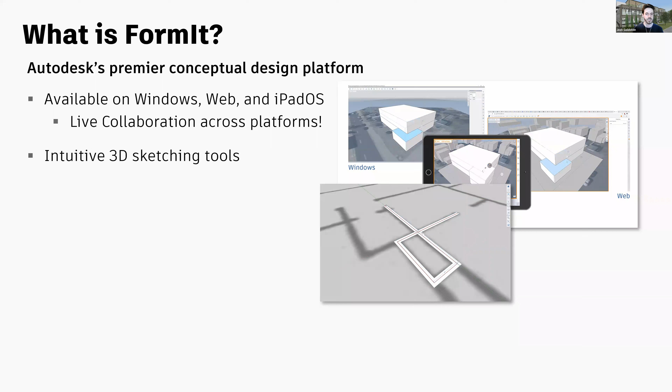FormIt offers intuitive 3D sketching tools, all sorts of things you'd expect from competitor apps - 3D sketching and extrusion and things like that. But where we differentiate is we have a very powerful solid 3D modeling kernel. In that animation on the right, you can see I'm extruding a face downward and doing some subtractive modeling that our competitors can't quite do. So we have a solid modeling kernel from the start.

This allows us to integrate a little bit better with Revit, although you can draw in 1D and 2D ways just like with our competitor apps. But we have everything you'd expect from a conceptual modeling application. You can organize your geometry into groups and add materials, layers, scenes, and all sorts of other metadata.

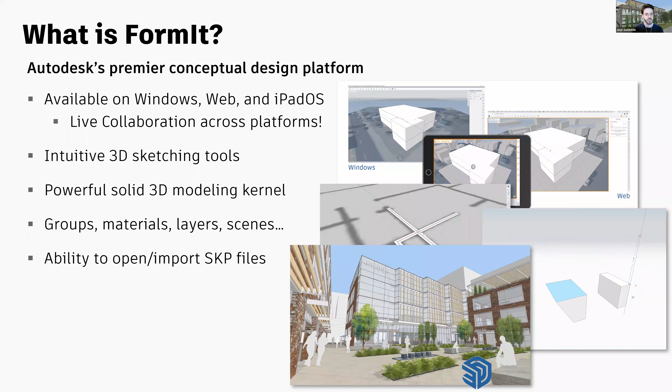Of course, we have great integrations with Autodesk software, including Revit and Dynamo. We also offer solar analysis and energy analysis using Autodesk Insight. So that was a very quick overview of what we offer, but not everything, of course.

In particular, FormIt and Dynamo is one of the integrations I am most excited about. I'm calling it an incredible mix of conceptual modeling and computational design. What's really interesting about how we connect to Dynamo - and I'll show you how this works under the hood - is that basically, once you set up a graph to work in FormIt...

Depending on what you're after, it could just be adding a Send to FormIt node at the end of the graph, and you can run graphs and generate geometry without ever seeing the graph. So there are folks out there who want to take advantage of computational design without having to see the spaghetti, and you can do that.

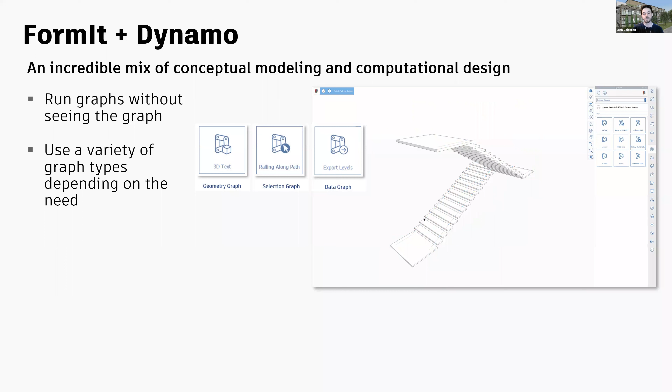We now offer, in the latest version of FormIt, which is 2023, released earlier this year, three different types of graphs. You can generate geometry with the geometry graph. You can use its selection, so you can select something from FormIt and then run the graph and get some result out with the selection graph. Or you can just use Dynamo and FormIt as a big calculator and have a data graph. We'll talk a little more about that soon.

And of course, you can build your graphs using all the native Dynamo sandbox nodes, but you can harness the power of special nodes that are FormIt only, like select from FormIt or send to FormIt, and there are a few other nodes I'll talk about shortly.

So just to show you what the Dynamo palette in FormIt looks like, I'm going to minimize my Zoom windows here. It's on the right—there's a little Dynamo wireframe icon along with the other things where layers, materials, and levels are. When you click on the Dynamo palette, you'll see an area showing available Dynamo graphs. This is where you can manage and run your Dynamo graphs right in FormIt.

So in this animation, I'm showing placing a stair graph that was pre-baked and ready to go, so I can just place it into the FormIt canvas. That's just a FormIt group that has a little attribute which is the entire Dynamo graph associated with it, so FormIt knows it's a special element.

So we offer a series of samples. I built them all because I came from an industry architecture firm where a bunch of stuff we would do was just really monotonous to do by hand. I was like, wow, let's use Dynamo to crunch those numbers, make stairs and ramps and storefront systems and all sorts of things without having to do it by hand, because it's really tiring.

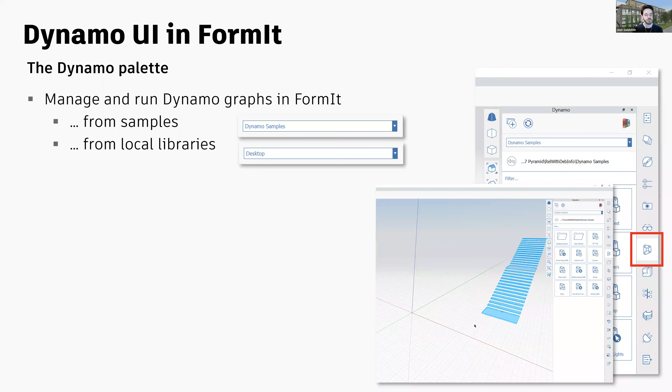If you have Dynamo graphs on your local drive or a server somewhere, you can also link local locations into the Dynamo panel. There's a way to do that in Edit Preferences, Dynamo area, and you can specify what folders you want to display in this panel. So you don't have to start from scratch—you can point it to a series of existing graphs.

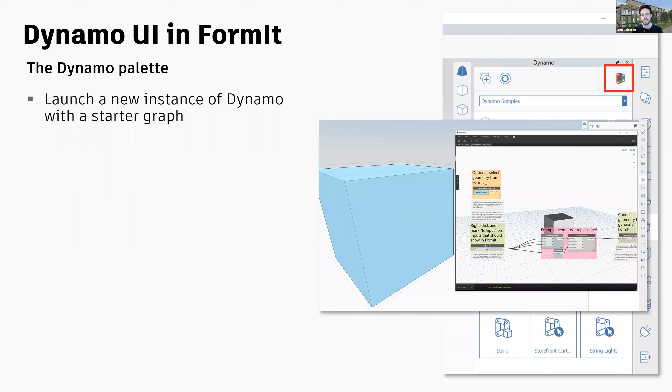Also in the Dynamo Palette, there's a couple things you can do. You can launch a new instance of Dynamo. This starts up with a starter graph or template—it's a little outdated, it's a cube with a pyramid on top, but it's just a primitive to show you they are now live linked. So we place a little piece of geometry in the scene, and then you can modify that graph and change it and save as, doing all the things you would do.

Or, like I said, if you have an existing graph somewhere on your local computer or a server, you can do what's called edit source graph, and you can launch Dynamo and be editing a live version of that graph. Then when you save it, it's actually saved to disk.

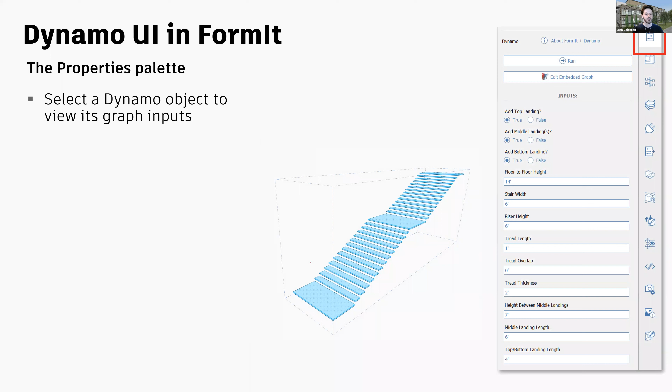The properties palette is another place you'll find interesting stuff with regards to FormIt and Dynamo. This is after you place a piece of Dynamo geometry into FormIt. When you select it, the properties palette in FormIt automatically knows it came from Dynamo, so we display all of the inputs that were saved to that graph.

Now, the caveat is that the inputs must be marked as 'is input' for them to show up here. That's just a way for you to explicitly say, hey, these are something I want to expose to the person that's going to use this downstream, even if it's you or one of your colleagues. Some inputs may not be worthwhile showing, but if they are, mark them as is input and they'll show up.

We support a special node called FormIt length string, which we built so you can specify dimensions in a friendly format rather than just decimal numbers. But we also support number slider, integer slider, regular number, string input, and a Boolean toggle.

Also in the properties palette, once you select one of those graphs and see those inputs, you can change them and click the run button. You're modifying this copy of the graph that is embedded in the FormIt model, and you're rerunning the graph without actually having to see it. So this is a nice way of harnessing the power of Dynamo without showing the spaghetti.

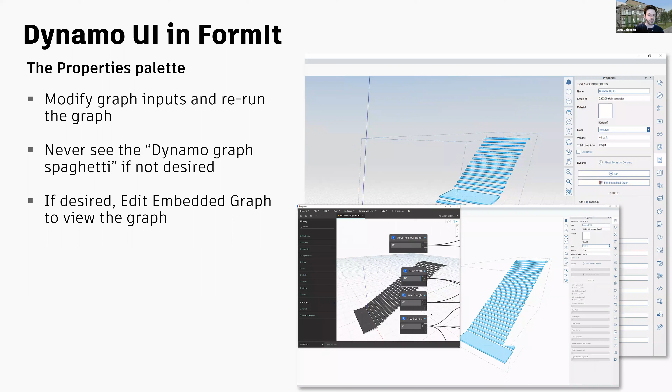But if you want to see the spaghetti, if you want to see the graph, you totally can. When you select the Dynamo object, you can click the button that says Edit Embedded Graph, and it's going to load up the copy of this graph that is now embedded in the FormIt file. So you're not editing the version on your computer, you're editing the version copied into the FormIt model. From the properties panel, you can also reselect geometry you've selected previously to run the graph, and I'll get into that shortly.

About those graph types - there's a geometry graph, a selection graph, and a data graph. The geometry graph creates geometry when you run it. This requires a Send to FormIt node, or multiple Send to FormIt nodes, at the end of the graph connected to whatever geometry should appear in FormIt.

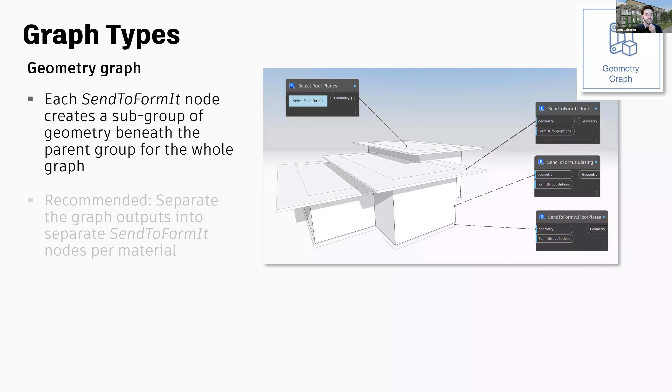The beauty of this is that you can use multiple Send to FormIt nodes as a way of organizing the geometry that comes out of the graph. In this example, I've got a building, and I used a Send to FormIt node for the roof, another for the glazing, another for the floor plates. It's recommended that you separate these out, probably by material.

Because the beauty is that you can paint the subgroups that are generated inside the main Dynamo group with materials, and then when you rerun the graph, those materials will stay.

Here's an example. I made this graph that generates a building from some planes in FormIt. You select the planes, and when you modify the planes and rerun the graph, the whole building changes. But since I painted those materials onto those subgroups, the materials remain. It's a really nice way of rerunning the graph over and over again, but still having some of that data, the FormIt materials, remain between runs.

Then there's the selection graph. When you run this, the very first thing the graph does is ask you for a selection. This requires a Select from FormIt node, or multiple - you can actually have multiple.

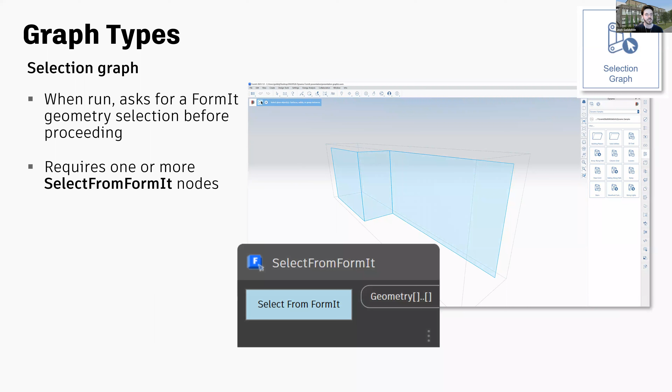So you can say first select, like we have an array along path - select the object you want to array, and then select the array path. The node name is going to be the selection prompt message. The Select from FormIt node can accept anything - it could be an edge, a surface, a body, or a group, which is actually what we recommend using - group instances. You can select a group instance, and it's going to grab all the geometry out of there.

In this animated image, I'm actually selecting a group containing a series of planes of glass or solids of glass, and the graph then takes that, parses it, and applies a storefront system to it. So in the selection prompt, you can say, in this case, select the glass objects - it could be a surface, a solid, or a group instance.

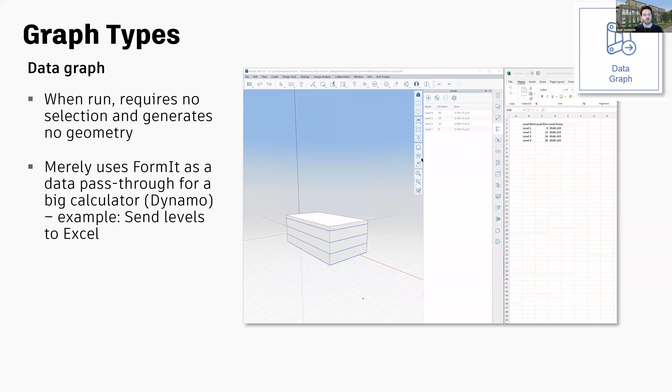Then there's the data graph. This doesn't require a selection and doesn't generate any geometry - it basically turns FormIt and Dynamo into a big calculator, using them as a pass-through. An example that's useful here is you can send the FormIt levels to an Excel spreadsheet. This doesn't generate anything geometry-wise, and doesn't require a selection, but it gives you some useful data that passes through the two applications.

Again, the inputs and outputs show up here, and these actually show up in the Dynamo palette this time, not the properties palette, because you don't have anything selected. So the data graph is a bit of a new beast - we added it in the most recent release in 2023, and I'll show that shortly. Then there are a few other nodes I wanted to mention.

The FormIt length string node allows you to work with friendly dimensions instead of raw numbers. So I can put in 3 feet 6 inches instead of 3.5 or 106.68 centimeters.

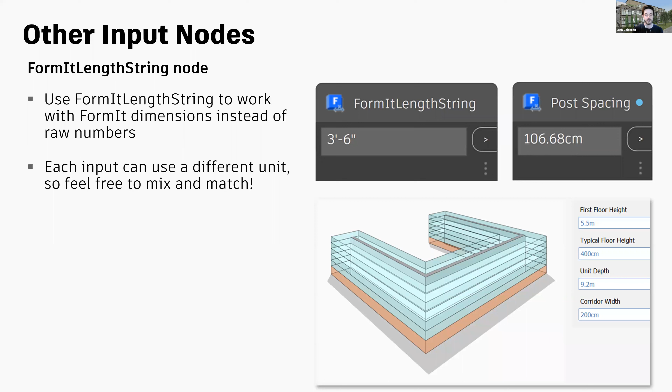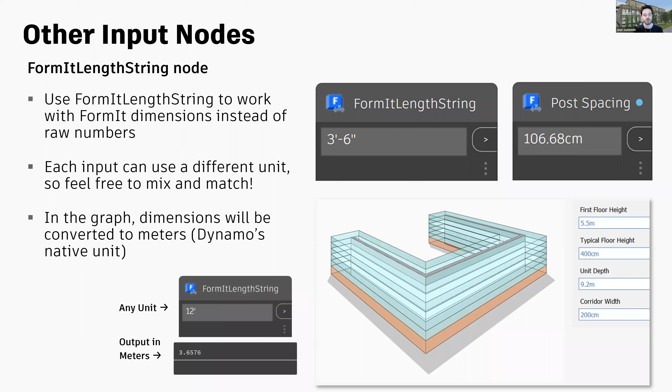You can mix and match the units. So the same graph, if you have multiple dimension nodes, can have different dimension or unit types in there, which is really interesting. When you're editing the graph, the dimensions will always be converted to meters. So here in this case, I entered 12 feet, but it comes out as 3.6576 meters.

There's also a console log node, so you can display longer messages, like here's a bunch of data or a long message from Dynamo that'll show up in the script output window in FormIt for Windows.

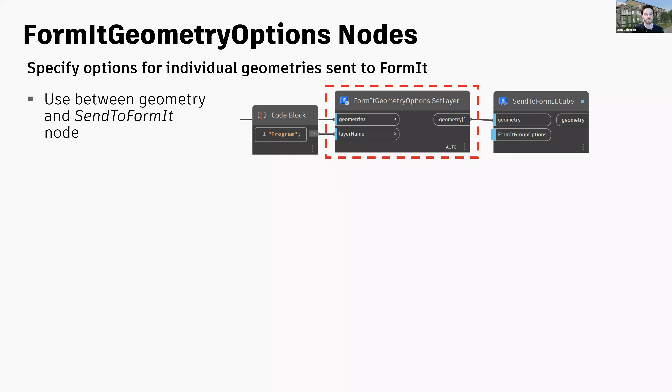And there are some nodes called options nodes. We have two versions of these: this is the geometry options here, and there's also a group options. The geometry options allows you to specify, for instance, a layer for the geometry that is sent to FormIt from a Dynamo graph, and this would actually happen upstream from the send to FormIt node.

So you can control the fine geometry that comes out of Dynamo, and then you can also use FormIt group options, which apply to the subgroups generated by the send to FormIt nodes. These actually attach to the send to FormIt nodes themselves, and you can daisy chain them together.

So you can actually set a layer on multiple levels here, so to speak. I can say a whole group is going to be on this layer, but each individual body is going to be on a different layer. So again, we have set as mesh, set layer. You can set an attribute, a string attribute on there, and you can also adjust its curve and surface faceting count.

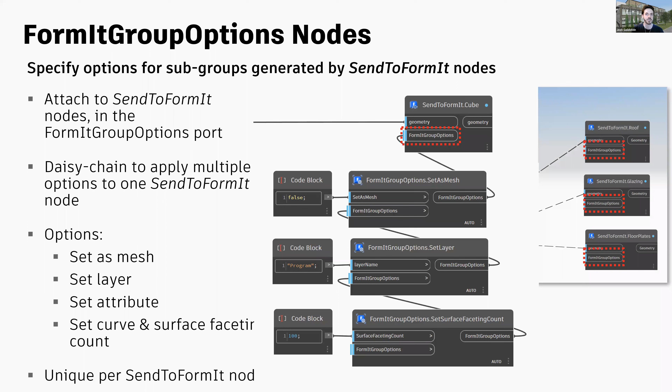These can apply to individual send to FormIt nodes, or you can connect them all to the same options for all the send to FormIt nodes. There's a lot of ways, a lot of customization you can do here.

We also, as I mentioned, have the ability to connect to the JavaScript API, so you can actually call any FormIt JavaScript function and pass in any necessary parameters. In this example, I am using the FormIt.callJS API to get the total gross area from the FormIt model and then report that out into the Dynamo graph. I could do something with that if I wanted to.

And just a couple of other things more general here: the way Dynamo works inside of FormIt is it uses groups, so the same group behavior from regular groups still applies.

So each of those geometry graphs will generate all the geometry in a group, and those instances can then be painted. They can be copied, which means you've made a copy. So it's like a component in SketchUp, a block in AutoCAD, or a family in Revit. So there's going to be a link there.

You can also make them unique. So in this case, I've taken one of those stairs and made it unique, and changed its parameters so it's no longer acting like its parent did.

You can also ungroup them if you want, but I would not recommend that because you're breaking the Dynamo connection. If you don't want to use the Dynamo connection anymore, just leave it—you don't have to rerun the graph. Ungrouping it means you'll never be able to run that graph again.

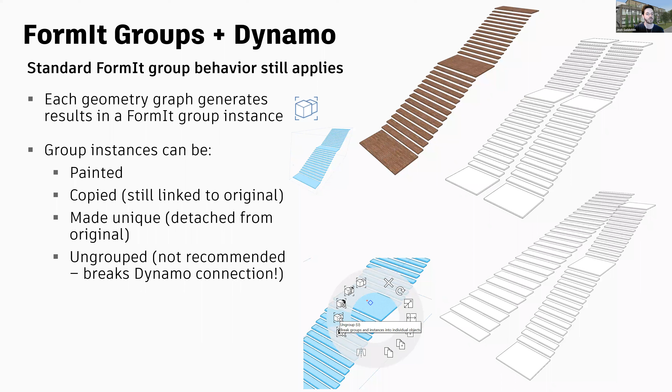I also wanted to mention that when you place Dynamo objects into FormIt, you're embedding them into the FormIt model, which is really cool because I can send that FormIt model with Dynamo stuff in it to a colleague, and they can select those objects and rerun them. There's no need to send separate DYN files or map them back—it's all embedded in the model.

So this is a model I built with a bunch of things using Dynamo—graphed stairs, storefront systems, trellises, and all that stuff. If I sent that to one of my colleagues, they could rerun all of those graphs.

This is why when you select one of those in the FormIt canvas, we call it 'Edit Embedded Graph,' because it's now embedded into the FormIt model and it's not connected to the graph that came from the disk anymore.

And the last thing I'll mention is that we made this multi-threaded, which is really nice. Dynamo will run in the background—you can continue modeling while the properties panels are blocked, waiting for Dynamo to finish. So here I'm applying railing along the path, and Dynamo's going, but I can still orbit the scene and go off and do something else while Dynamo crunches the numbers.

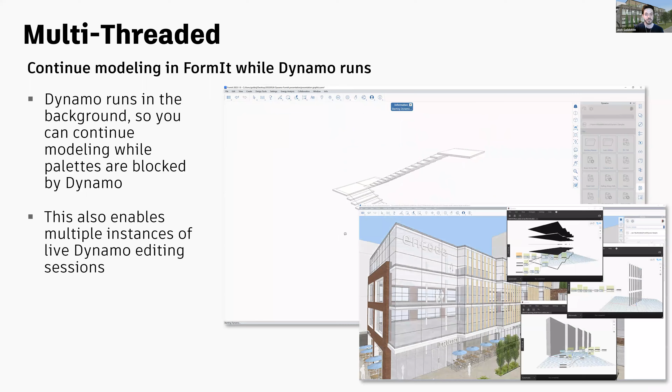This also enables multiple instances of live Dynamo editing sessions all at the same time, so it's very, very powerful. Okay, that was my spiel. Any questions before I get into the live demo?

No, I think you awed them with all that information. It was great information, and I'm blown away at the amount—how I've seen FormIt since its early days, just a little miniature modeler, and now, wow, it's a lot more powerful than it was.

Yeah, I've got a question. Those Dyn files that you embed inside the FormIt—yes. Can somebody choose to not embed those as well?

No, once you place them, they're embedded. You can swap them out—so if I had a new version of, say, the trellis, I could hit Edit Embedded Graph, then in Dynamo do File Open, and swap it out with a new version or a completely different graph. But once I save it, it's embedded—we're making a copy from wherever it came from into the FormIt model. FormIt doesn't currently support external linking, which I think is what you're getting at. It's something we've wanted to add for a while, but it's a big project. So right now everything is encapsulated into the FormIt model.

I was just thinking, if I had a super secret recipe, I wouldn't be acting in the spirit of community and good karma, Saul—but I might not want to share that. I was just curious. Yeah, that's true.

You could ungroup it and delete it—the Dynamo thing goes away and you get the geometry. Under the hood, it's all just FormIt geometry anyway, which I'll show. So if you don't want to share your secret sauce, you could just delete the sauce or ungroup it.

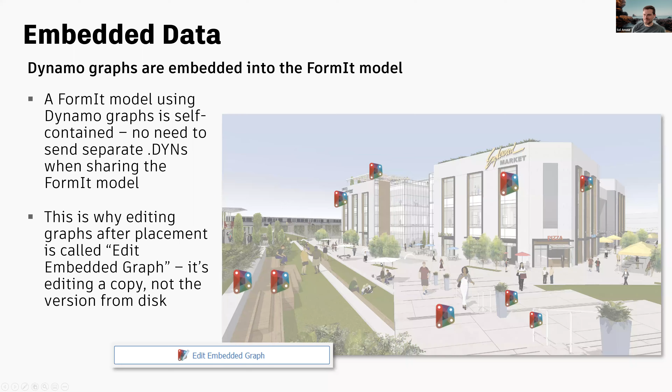Yeah, I was going to say that exact same thing—you'd already covered it in your presentation amongst the 1,000 other awesome things. I know, it's a lot that we went through. All right, so I will share a couple things.

So I just wanted to point out, a lot of people think FormIt is just like a little simple modeler, but you can really make some incredible models. You can do everything you want and make a bunch of amazing detailed models. So you can get to this level.

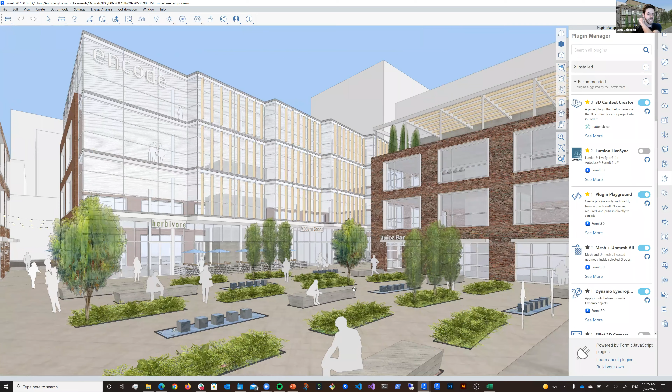For the purposes of our discussion, I just want to check, you all can see FormIt now, right? Yes. Okay, cool. I don't trust Zoom these days.

Okay, so I've got a couple of things I'll show here. I have a bunch of pre-baked Dynamo objects, but I'll place them into the canvas from scratch as well. So here's the Dynamo panel, this little wireframe Dynamo icon. These are the samples. There's a couple of subfolders I made for building masses and solid utilities, but the top level ones, like 3D text, column grid, and louvers, these are all really nice and useful.

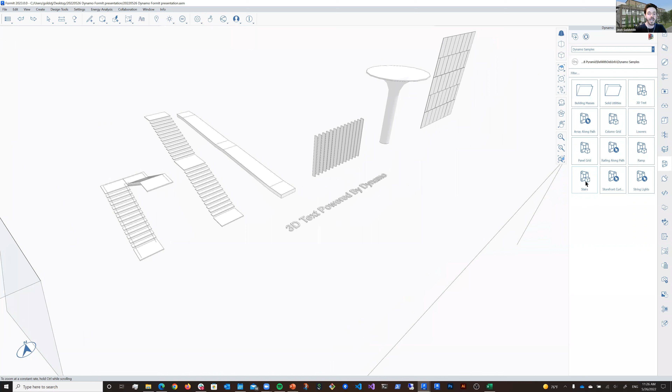So these were pre-baked, which basically means there's a Dynamo file and a SAT file next to it. So when I place this into the FormIt model, it literally just places a new group, a brand new version of the stair that came out. And every time I place a new one of these from the Dynamo panel, it's not going to be connected.

So that second one I placed, if I make a change here, say the stair width 4 feet instead of 6 feet, and run that, it's going to affect only that version. Every time you place a new instance from the panel, it's going to assume you want a unique instance of that. But if I make a copy of this and place it again, moving it so it's not intersecting with that other thing, these two now are linked because they're the same group.

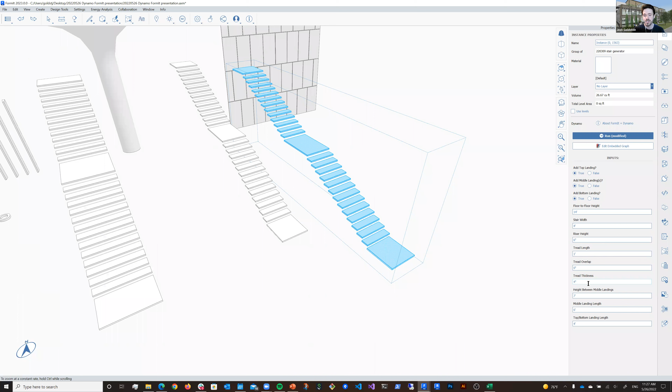I'll change something like the tread thickness to 4 inches. This is using that FormIt length string node, so it's basically a string input. I could put whatever I want in there, but it needs to rationalize out to a dimension. So I could use centimeters, millimeters, meters, feet, or inches, any of the units we support in FormIt. They're listed here.

So anyway, I just changed those stairs and these two things changed, leaving this one the same. One of the things I love is that Dynamo has Boolean inputs, so you can change the way the graph winds up by saying, well, I don't want a middle landing, so I'll say false on that. When I run this, it's going to go through a completely different part of the graph and eliminate that middle landing for me.

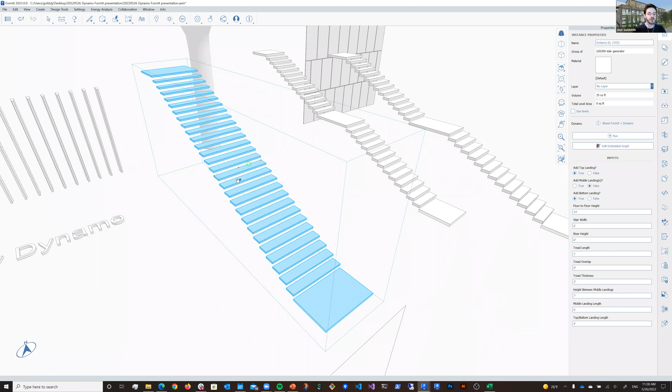Now you'll notice, what happens under the hood is when I first run a Dynamo graph, like I just did, it took a little longer because under the hood we've spun up a new Dynamo instance. If I go look in Task Manager, I'll see there's a Dynamo instance or a Dynamo CLI application under the hood waiting for me to make changes. There's another instance controlling these two and any others I've run.

So the next time I run the graph, I'll just say give me that middle landing back, this is going to be much faster. It just gave me that landing back because Dynamo is now spun up and ready to go, watching for changes. We don't have to take the time to actually get Dynamo started. That's a really nice thing we added a few releases ago, it's like preheating Dynamo. Once you make a change, the rest of the session is going to be a lot faster. So stairs are cool.

I made a ramp because, as an architect, I just wanted to quickly make some of these common elements and didn't want to do the math myself. So again, there's an option here to change, maybe I don't want middle landings, or I want to change the middle landing length.

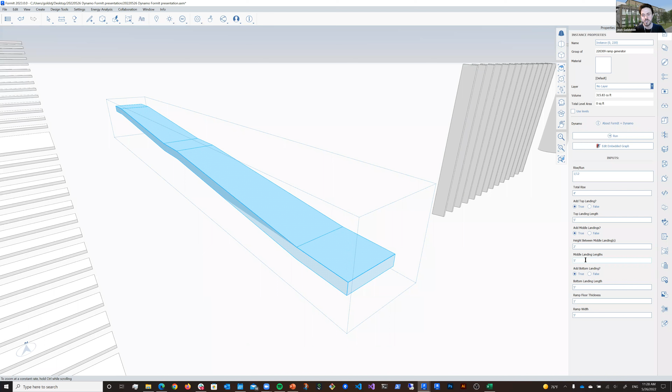This is going to spin up a new instance of Dynamo under the hood. I can keep moving around inside of FormIt, and when this comes back, there's a little message that the Dynamo run is completed, and then the properties panel is unblocked again. So just a couple of things there.

And then there's all sorts of things - there's louvers, and I made a panel grid, some of these things that are just a little tedious to make yourself, so I made a Dynamo graph for them.

One of the things I'll show right off the bat, which I really enjoy, is we added the selection ability probably several releases ago. Huge deal - always wanted to select something from FormIt and use it in a Dynamo graph.

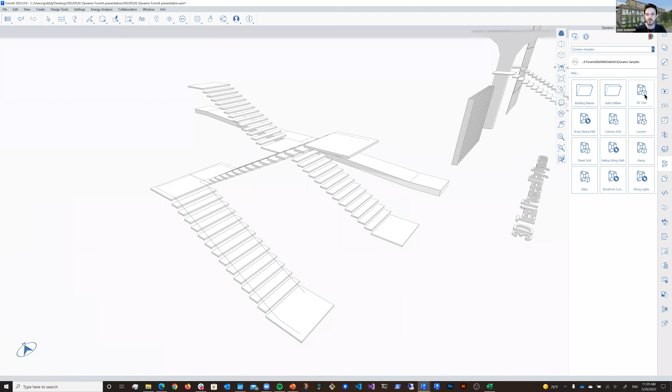So when you look in the Dynamo panel, you'll see that the icons are a little bit different. Like 3D text, this has a little cube, which means it's a pre-baked geometry graph - it's just going to generate something. When you place it, it's going to be in some default configuration. So we let this one be 3D text.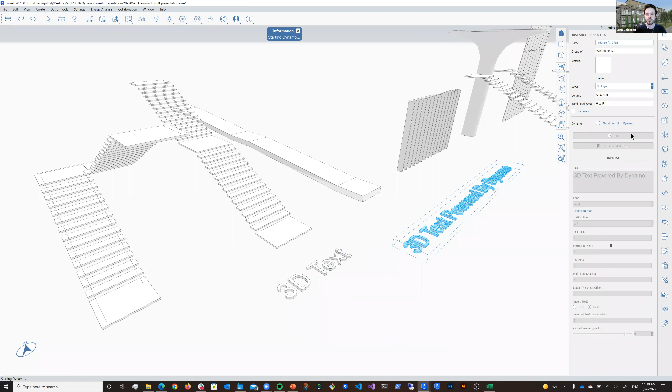And by the way, you can do 3D text thanks to Dynamo. Since it uses the same system, you don't have to regenerate the text if you want to change it. So if I wanted to add an exclamation point, I think I already had this one pre-baked, and that's going to give me an exclamation point. It's nice because you can always select it and change it and then move on, so you don't have to regenerate it. But back to the Dynamo panel.

So the cube means you're just going to drop some geometry in, and that just finished. But the arrow, the little selection arrow, means that it's going to ask you for a selection. So we've got array along path, railing along path, storefront, and string lights.

I'll just show you this railing along path. When I click that, it's going to pop over here on the left side, and it's going to say select a railing path, edges, or a group instance.

We recommend using group instances, because if you selected raw edges and those edges changed, or you deleted part of them or something like that, the IDs could change, and Dynamo will then have to ask you again - give me those edges, because I've lost the ones you had me looking at originally, since something in the model has changed.

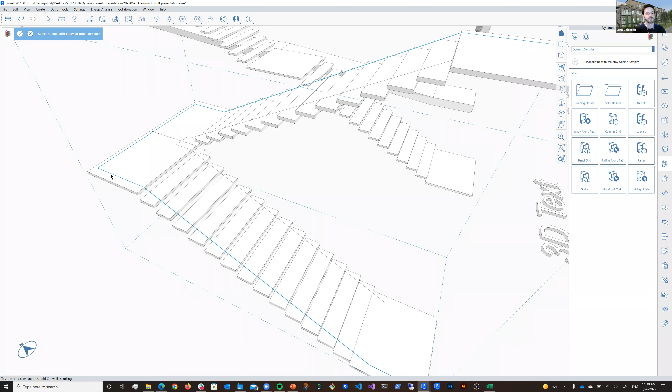But if you use a group instance, it's always going to find that group instance, and it's going to get everything out of that group instance. So here I've got an instance that just contains a bunch of connected edges. I'm going to just give it that instance, and it's going to extract all the geometry out of that instance, and get me a railing that follows that path. Pretty sweet, and this would have taken a lot longer than those 5 seconds to do manually.

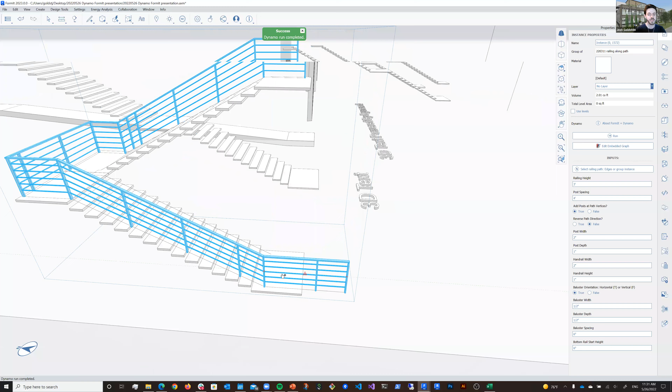The other beauty of an instance is if I double click into that group instance and change something - like I'll just make this longer - I can make a change inside here, then select the Dynamo result or the Dynamo group, and just say run. It's going to go and find that instance because it's still there, and get everything out of it, and find that edge has gotten longer. So it gave me a longer little railing there at the bottom.

Pretty sweet. And again, I have another series of edges there that I can do the same thing to. So there's another railing along path, and I'm just going to let that run while we go and look at something else.

Storefront - again, as a former architect, I always found making mullions was just a real hassle and a real waste of time. This has actually been a really long project for me since I joined the FormIt team. I always wanted to make something here, and when we added the selection node, it really made it possible.

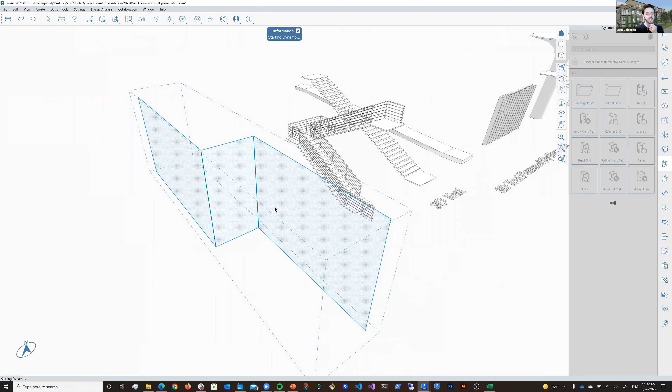So the storefront system just asks for whatever the glass object is - it could be surfaces, solids, or as I said, we recommend using a group instance. This here is a group instance that just contains a few planes of glass, and I'm going to get a storefront system that is now attached to that plane of glass.

And again, it's going to be in some default configuration. So if I wanted to change mullion width or depth or spacing between them, like here, I'll make these 4 feet on center instead of 3 feet on center, and rerun that. This is now preheated because it's already run, so it's going to be pretty fast to regenerate.

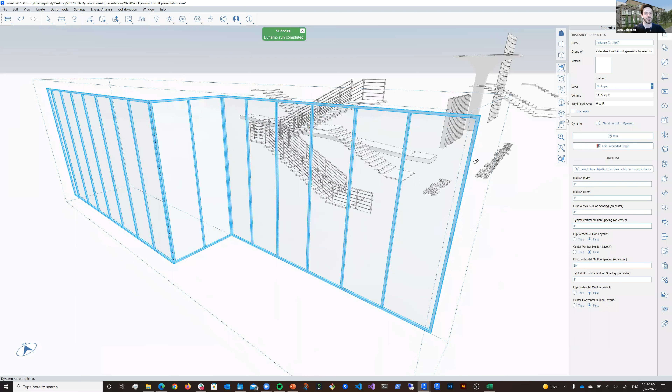And then of course, if I want to change the horizontal, so sometimes I like to have no horizontal, I can just make this a really big number, like 15 feet. I don't know how tall it really needs to be, but I'll just say okay - so it wasn't quite tall enough. But you can make these numbers kind of knowing they're not going to work. So if I say I want the first horizontal mullion to be higher than the thing is, you're actually not going to see any of those, which is maybe what I want.

And of course, if I go in here, double click, and make one of these glass pieces a little thicker - I can't remember, you can use solids here, so sometimes it's like a thickened piece of glass, or you can just use a plane. And then if I click that Dynamo group and rerun it, I'm going to get that extended to fit the glass. Pretty cool, and a big time saver.

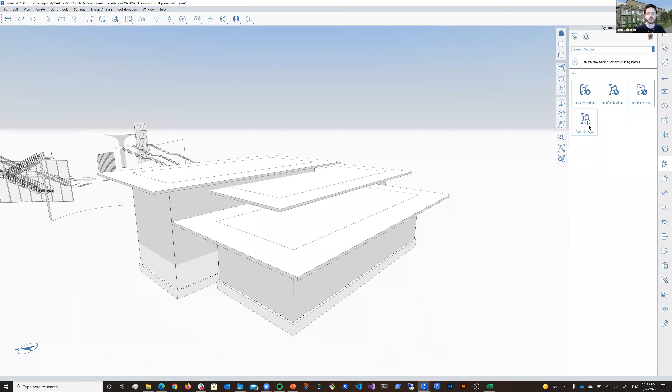And I guess I just wanted to show very quickly - so this here is that building, it's like a building based on planes. So here, these are the 3 planes inside of a group instance that I used as the selection node for this building. It's actually a sample in the building masses folder - there's a bunch in here. You can make a mass by outline, I'll show that in a second. But this is called roof planes building, and it's probably not all that useful generally, but it's good for a demo.

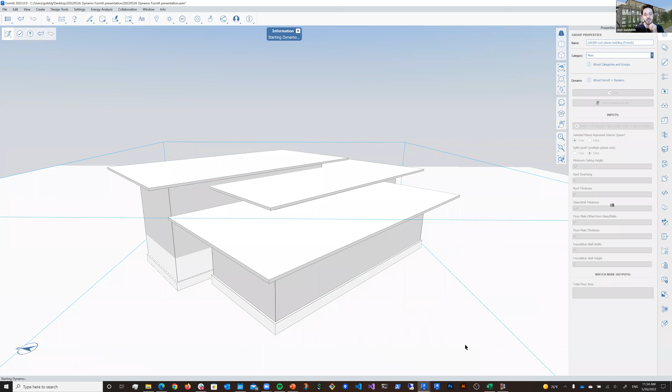So this is using those multiple send-to-FormIt nodes. If I select this instance, or you can double click and go into the instance, it'll allow you to see the parameters as well. And if I hit edit embedded graph, this is going to give me a live Dynamo connection, so it's going to launch Dynamo. This is a little bit of a large graph, so give me a moment here to let this run. But right now, Dynamo is connected to the FormIt session, so any changes I make in here, I can see them live.

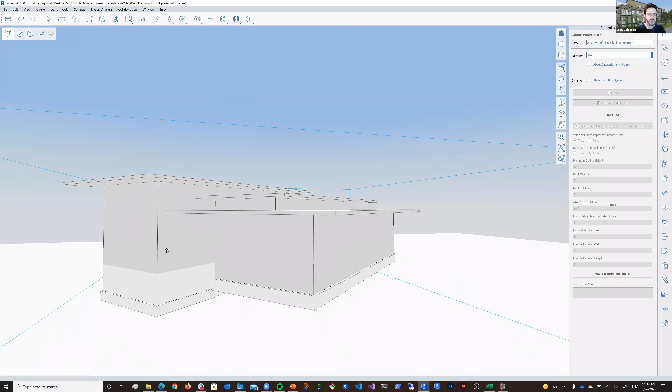Okay, so you can see I've got the building back here inside of Dynamo, and it's connected to the FormIt session. But what I wanted to point out is at the very end of the graph, I've got the send-to-FormIt for the roof planes, the glass, the floor plates, and the foundation walls. And that translates in here - if I go inside of the Dynamo group, here's the roof planes, here's the glass, the foundation walls.

And the reason I did this is so that I can paint. Let me just turn off my ground plane since that's cutting in a little bit. So in the materials panel, I can paint this subgroup with glass, and I can paint - maybe I'll go inside and swing around and paint the floor wood or something like that. And I'm sure I've got some concrete here. So there, I've applied a few materials - whoops, I'm inside of a building.

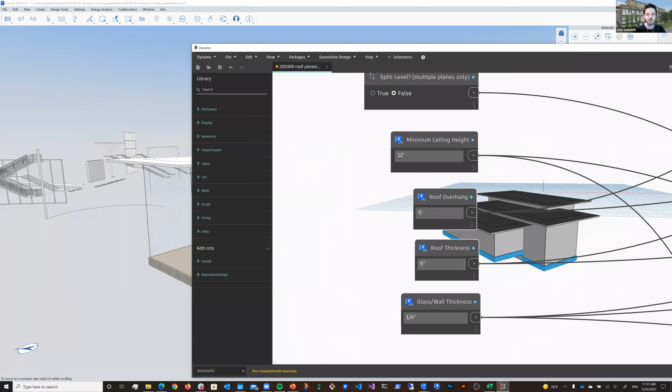Okay, so I've just painted those Dynamo elements, and I've got the Dynamo graph running here live. So maybe I want to change something like make the roof overhang a little bit smaller - here's 4 feet, so it's going to change in the Dynamo graph, and it just made it a little bit smaller in FormIt, maybe a little hard to see. So I'll change this back to 6, and you'll see it. Actually, I don't know if I executed that - there we go, 6 feet, and you'll see it'll get a little bigger inside of FormIt. So I've got a live connection here, which is really nice.

Now let's see here. I'll close this, save it, and close it. So I just closed Dynamo.

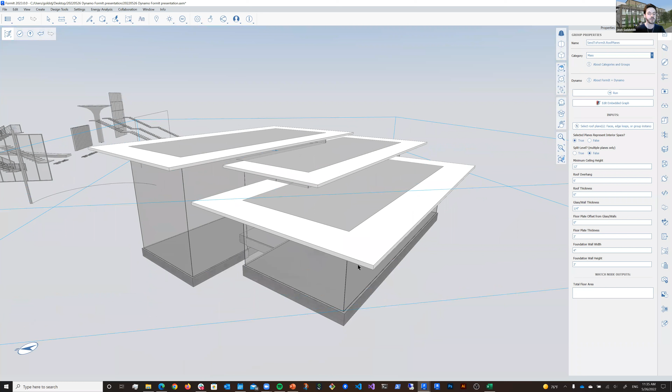This is still here - these are real, basically FormIt objects. So I could come in here and modify one of these roof planes if I wanted to, and that's totally fine. Maybe you're not going to rerun the graph anymore - you wanted to use the graph as a starting point, and then manually modify the elements. That's totally cool. Just remember that when you rerun the graph, that change is going to be lost because all this stuff is going to be rebuilt.

So to illustrate that, I'm going to go into these roof planes and make one of these angled just for fun. And I can come out here, select the Dynamo object, and say rerun. It's going to go grab those roof planes and give me a new version of the building that has an angled edge. But I did lose that manual change that I made, which is expected.

So it is an interesting mix of manual editing and computational design. Just remember that when you rerun the graph, you'll lose any manual changes, except for the materials I applied on these subgroups, because I didn't actually modify the geometry - I just painted materials on the groups.

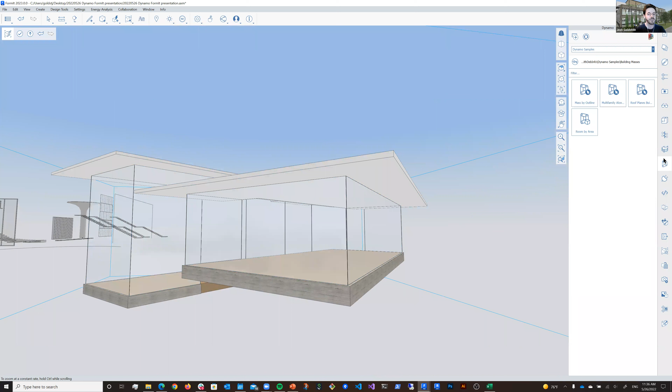The last thing I want to show here is I'm inside this Dynamo graph, and you can see I've got the Dynamo parameters. I can actually put a Dynamo graph inside of another Dynamo graph, which is wild. So if I go to the samples and say I want to apply a storefront curtain wall system to this glass - since I organized that glass as one group containing a bunch of pieces of glass - I can do that.

This is a little weird because we don't display the loading bar, since you're technically inside a Dynamo graph, so we're showing you those parameters. Dynamo is running, but it might not be evident. After a couple seconds, you'll get a storefront system applied to the whole building, which blows my mind. This is the dream for me as a former architect - I just want to apply these things and get them looking good and real for a client presentation. I don't want to spend 3 hours making mullions.

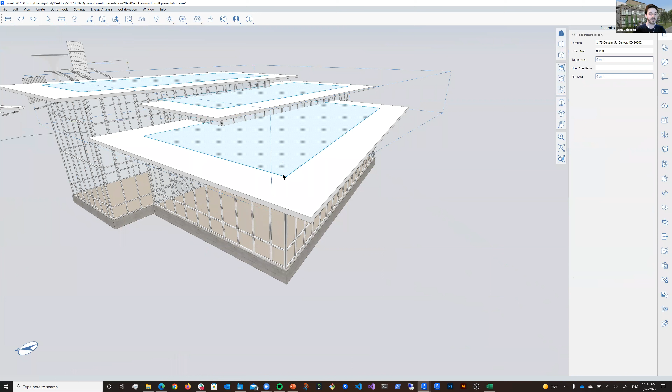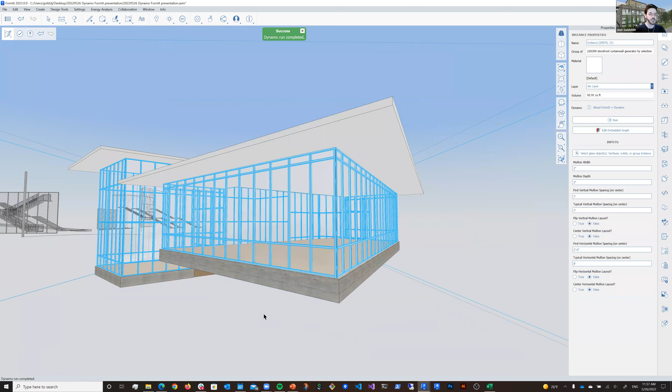And again, all the same rules apply. If I were to make this even wider, do something really wild, I could select the building and say rerun. Then you'll notice things are a little out of sync. I can come in here, select the storefront system, and say rerun, and it's going to grab the new data from that other graph - the building graph - and give me a new storefront system based on the changes I just made. So I just updated a whole building and its subsystems in a couple seconds using FormIt and Dynamo. Really cool.

Okay, that was a lot. I'll pause there for questions.

I hope folks are thoroughly blown away. So far no questions in the chat, so it seems to be the case. Does anyone have any questions, anything you've seen that you're curious about, maybe you want elaboration on, or any sparking of ideas?

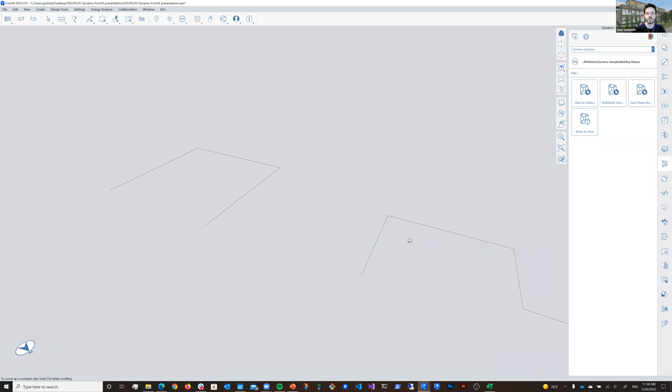So I mentioned we have this subfolder for building masses, and I built these a little while ago as well. So if you wanted to make, say, a quick multifamily building, I have this multifamily-along-path tool, and you can pick a group instance that has a little path along it. I'm just going to do some programming studies using a simple path, and Dynamo is going to give me a mass to work with. I made this so that it gives you a double-loaded corridor.

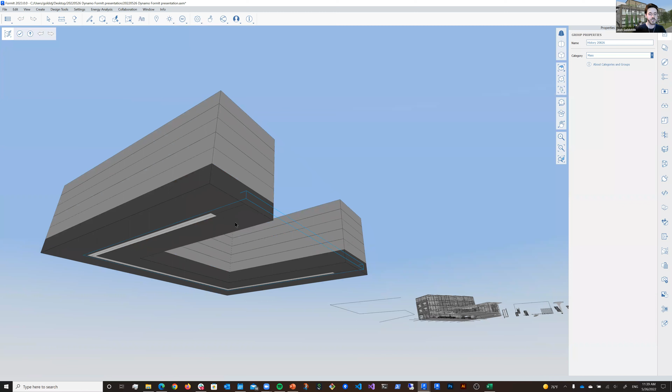Again, these are organized into subgroups. So if I wanted to show these as programs - these are going to be ugly colors, but let's say that's retail and this is residential or something - I've got a nice little programming study, and I could go into the original line work. I'm inside a group here, and it's a little hard to see, so I can hit the H key to hide all the context around it. I'm just going to make one of these wings a little longer, or maybe make it angled.

I'm going to hop back out, select that building, and say rerun. That's going to regenerate and give me an angled wing on that building. So it's pretty cool—it's not just detail elements and building elements, it's also useful if you want to use it for programming studies.

Josh, we have a question from Bob Pierce in the chat. He's asking, how about a closer look at the Dynamo nodes that do all this work? Yes, let's see, what would be a good graph?

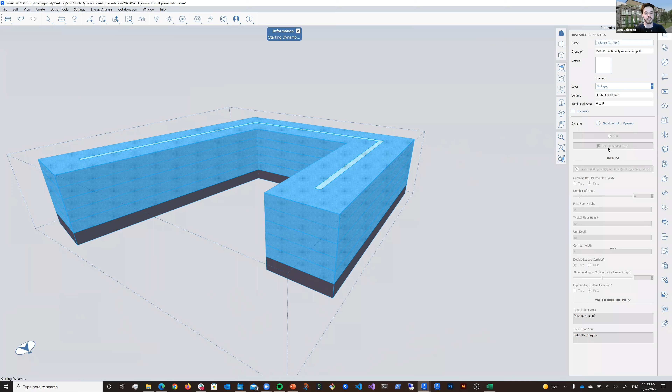I think this one's not too complicated, so I'll edit the embedded graph. Again, I've placed this from the samples, but it could have also been from my local computer. So I'll show you those nodes.

For everybody who might be surprised at the way Dynamo looks, Dynamo has undergone a visual refresh from version 2.13 onwards. So all of the hero products, including FormIt, which released with Dynamo, have this new look and feel. We'll be doing a session in the not too distant future about all of the changes for that.

Actually I'm kind of proud—FormIt is an early, quick adopter of Dynamo. So whenever Dynamo gets a new version, we are pretty fast to upgrade. So when you get a new version of FormIt, it's probably going to have a new version of Dynamo.

Here is the select from FormIt node. In the library, you'll see this is the version of Dynamo that ships with FormIt. When you install FormIt, you actually get a copy of Dynamo Sandbox that has a few special nodes in it. Under add-ons here in the library, there's a few of the main FormIt nodes.

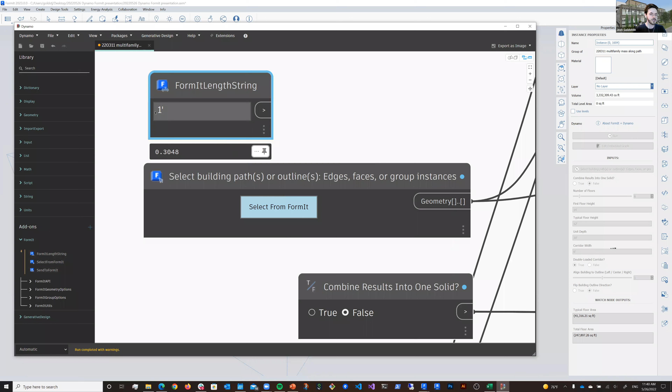There's the length string node, which allows you to specify dimensions—that's going to come out as meters, but you can put whatever you want in that box. There's the select from FormIt node, which allows you to select FormIt geometry, and that's what I'm using here. Then there's the send FormIt node, which is required if you want to generate geometry in FormIt.

In this graph, I'm using a few of those at the end so that I can paint those subgroups. I've got the first floor mass as a send to FormIt node and the typical floors mass, which is why I can paint the bottom red and these other elements blue. Then I think I've got one more send to FormIt node, which is the hallway mass, which is why this little piece of hallway here is its own separate group.

I can actually move these up and show you—so this is its own send to FormIt node here. But it's really cool that we support multiple of those at the end of the graph.

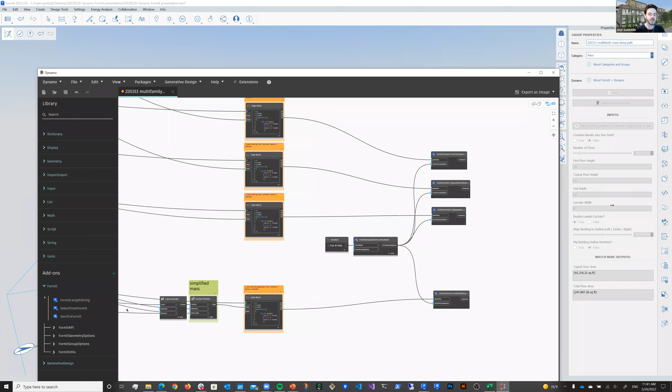Here are a couple things—you'll notice I've got some group options here. I've decided not to let these be set as a mesh. In FormIt, we have meshes and we have objects.

Objects allow you to, say, place a primitive—this is a regular object. I can grab its edges and its vertices and modify those. But if I generate something in Dynamo that's really big or really complicated, you might want to use a mesh.

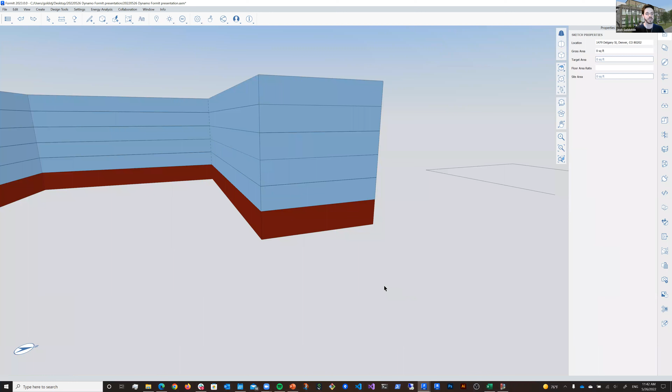The default is mesh just for performance reasons, but if you don't want that, you can set that as false. So I've got a FormIt group option here saying I don't want any of the send to FormIt nodes using meshes—I just want them to be regular objects.

Underneath here we have the JS API, so you can call your JavaScript API, which requires a function name and some parameters. These are all documented on our website if you want to go look at those. You can console log, or call a custom JavaScript function from a plugin. It's a little complicated—I don't want to get too deep into it here, but here's where you can also show a notification in FormIt.

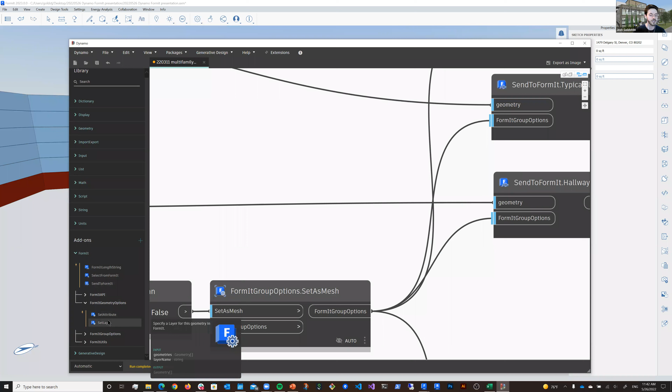Then there's the geometry options where you can set an attribute or a layer on geometry. There's the FormIt group options, which is what I'm using right here—set as mesh, set attribute, curve count, faceting or surface count and curve count, and then a set layer.

And what else do we have in here? Oh yeah, so we have that 3D text, and we actually made a custom node in here, so there's some utilities as well. But basically these top three are probably what you're going to be using the most often: getting friendly length strings, selecting from FormIt, and sending to FormIt. So that's typically what those will be. The send to FormIt will be at the end of the graph, and the select from FormIt will be at the beginning of the graph.

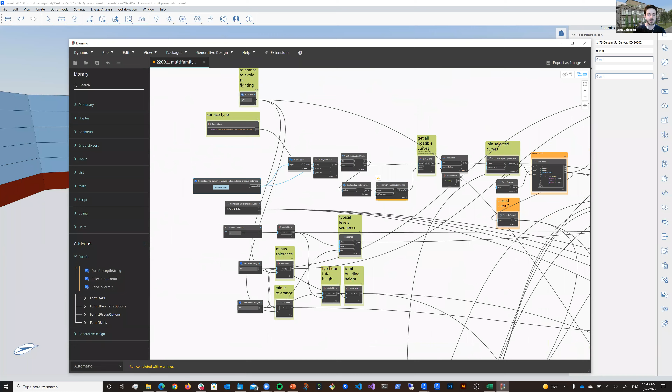And then I think in this case, I also have watch nodes. There's a watch node here that's just set as is output, so that when I look at the graph in the properties panel - well, it's in a loading state right now because Dynamo is running - but you can see I've got typical floor area and total floor area watch node outputs at the bottom of the properties panel. So when you're running Dynamo live like this, we don't allow you to change the properties here because you're already changing them here.

This does allow you to change things pretty quickly. So if I wanted to change the number of floors, as I showed previously, if I make that change here, you're going to see that change happen very instantly inside of FormIt. So I've got this live connection going, but I can save this and close it, and then when I select this, the properties panel will be unblocked.

Nice. And I think, Josh? Yeah, go ahead, we've got a couple of questions in here. Are we ready? Yeah, totally.

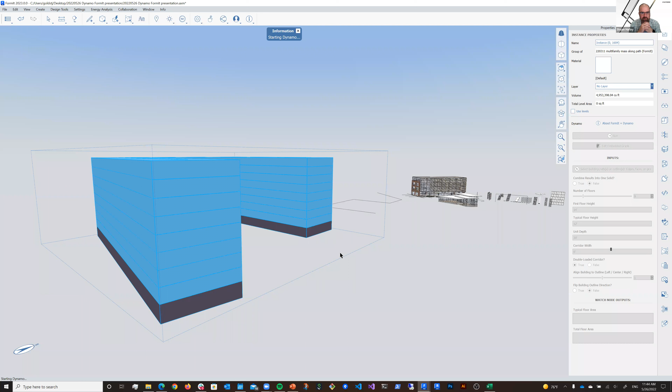We've got Tracy asking: once a client has selected an option generated in FormIt, do Dynamo generated masses export to Revit and pick up Revit materials as easily as before? So all of this stuff that you see here, even if it was generated by Dynamo, is really under the hood just FormIt geometry. So if I were to save this model and then load it into Revit, I would get all the materials into Revit just like you would normally as if you made these geometries yourself.

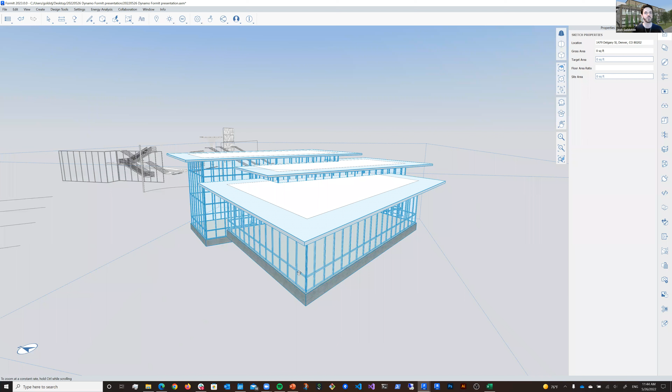We now are doing linking in FormIt and Revit 2023. It's a link, so it's an import instance, so there's not a whole lot you can do in terms of applying materials. You can apply wall by face in there, but you have to be in the family editor. There are some limitations there, but basically it's the way it would work as if you generated the geometry yourself. Things like the storefront system - it's just geometry, so it's not going to turn into a Revit storefront system, unfortunately.

It's just FormIt geometry, but all those materials will come across, and it'll look exactly the same as you would expect in Revit, but it may not have some of the smarts.

We've got Michael asking: how do embedded Dynamo objects react when sending someone using the FormIt free version? So if I were to save this model and open it in FormIt Web or FormIt iPad, they'll look exactly the same, there's no difference there. Again, it's almost like I generated it myself. The difference is when you select them in the properties panel, the free clients don't show anything - it'll look as if it's not a Dynamo object.

There's reasons for that beyond the free versus pro thing. Dynamo is a Windows-based application, and FormIt for Windows is the only one with the Dynamo connection, so iPad and web wouldn't be able to run Dynamo even if you were a pro subscriber. So the properties panel will just treat them as if they're a regular group, and you won't see any properties, but you can modify those objects as if they were regular FormIt objects.

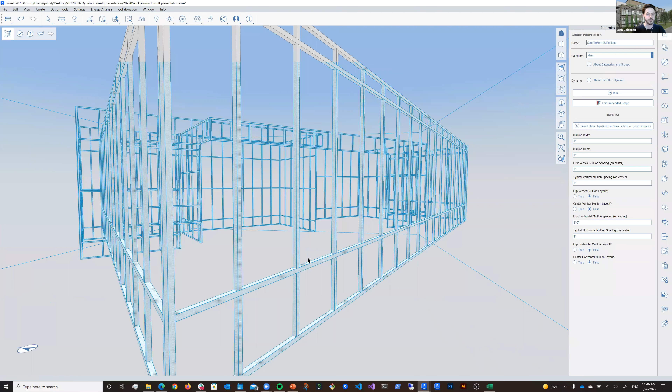And then the next time somebody opens it in Windows, they can rerun that graph - it would be just like this, I can go and modify the inside of these Dynamo objects. You just can't rerun the graph in web and iPad. So other than the smarts of knowing it came from Dynamo, there's nothing really different here - it's just a regular group with regular geometry. It happens to have an attribute that tells the Windows app, hey, this is a Dynamo object, so show the inputs.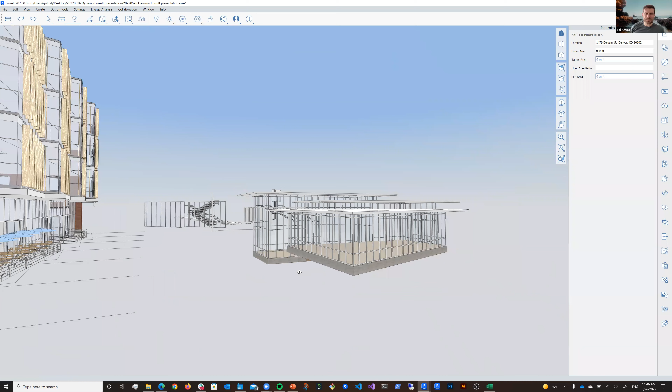I might as well, 5 to 10 minutes. I've shown this before, but I built this building. I called it Encode because it's encoded with Dynamo smarts, and I really like it. So this entire building is looking at this one path right here, this little path that has these sort of striated edges.

This whole thing is generating this Dynamo building, and I already ran this. So I'm going to make this into a curve, and let's say I want to make this whole building curved. So things like this soffit here is looking at those edges, so that's going to become curved. The glass is going to become curved too. So all I have to do is select these and rerun them. Unfortunately, there's no way to batch rerun, but it just takes a few seconds to grab the individual elements here, and they're all looking at that series of edges that's in a group.

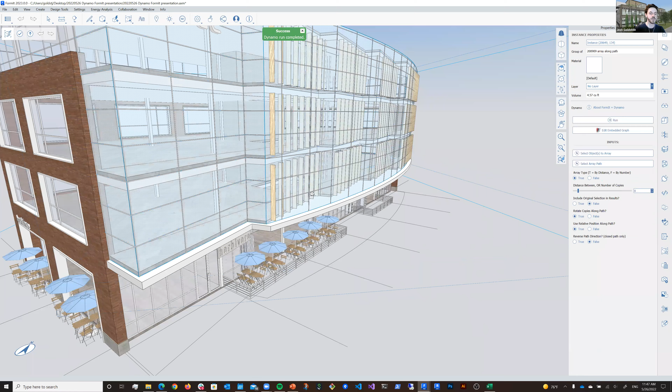As I grab each one of them, the louvers are going to update and the floor plates are going to update. So within a few seconds, I can basically batch change this whole building to become curved instead of angular. This is just an interesting example of Dynamo generating multiple pieces of the same building. It took maybe 25, 30 seconds to completely change the facade of that building, all using the selection node. And everybody's looking at that single group instance of curves, which I think is pretty sweet.

And then the only other thing I guess I can show is the data graphs. So here I've got a very simple, weird sort of building mass, and I've run this already. There's a Dynamo Graph that I've run, and I got it from my local library where I send the levels to Excel, and I've already got Excel open here. So I've got some level areas.

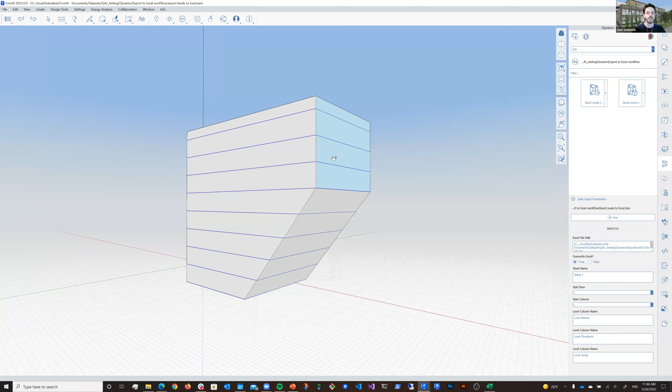So this is just exporting, it's actually using our API under the hood. I'm using the node, and I can show that in a second. But basically it says, give me all the levels from FormIt and put them into Dynamo, into an Excel spreadsheet. So I've got 9 levels, and the biggest one here is like 6,500 square feet. If I make a change here in the model and make that much larger, and then here in the Dynamo panel I can just click run, and it's going to update Excel. Now Excel tells me that the largest level is 9,400 square feet. So this is a really nice way to use Dynamo and FormIt as a big calculator.

And if I wanted to, I can right click this - oops, actually it's this one, edit source graph. So now I'm editing the version that's on the disk. In case you wanted to see how this is working under the hood, here comes Dynamo. It's a pretty simple graph, actually.

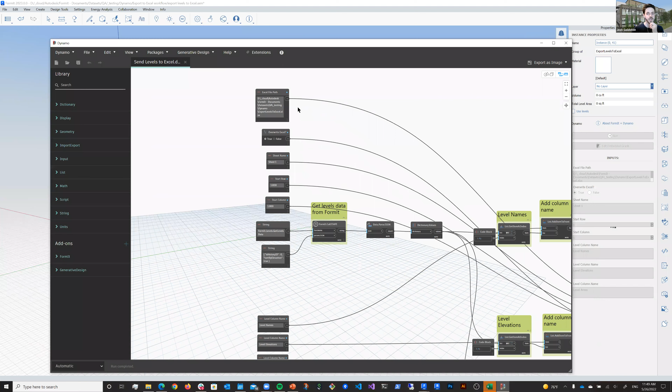So I gave it a path, just a string node, gave it some options here, sheet name and such. The call JS API here, this is really the meat of it. The function is called FormIt.levels.getLevelsData, and this is on our website. If you go and look, we have a whole documentation. All of our functions are documented, and then the parameters have to be in a JavaScript object.

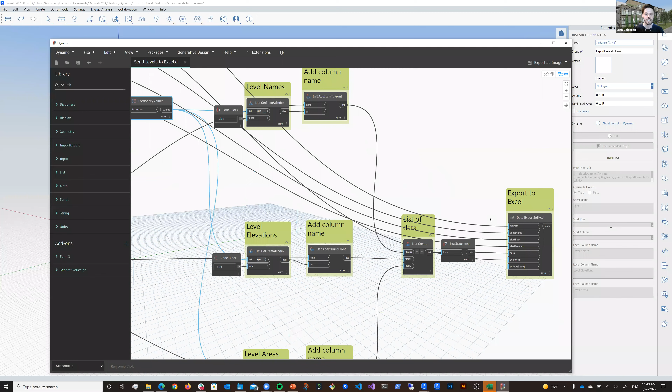It requires a history ID, which is going to be 0, basically the main sketch. Levels are in the main sketch, and sort by elevation true. The JS API gives me basically a JavaScript object, and I can parse that and turn it into a dictionary, extract all of that, and then export it to Excel. Or you can also use export to XML. But basically, yeah, that's this, and it's got a bunch of series of inputs that I've marked as input, so that in the properties panel - and this is going to give me an error because I just kind of killed it in the middle of its spiel.

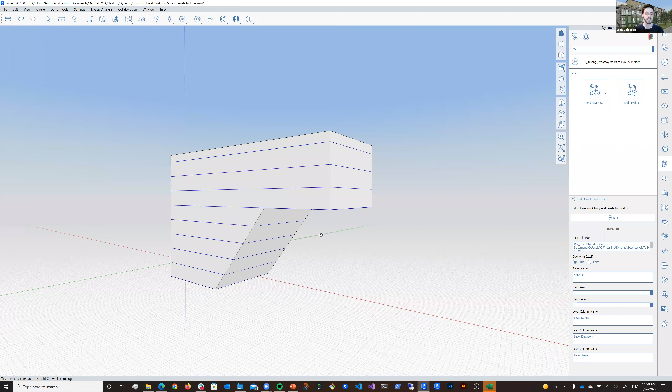So I've got a Dynamo graph here that's using just data, and when I rerun that, it gets the updated information from FormIt and sends it to Excel. It's a really interesting way of connecting. Dynamo now knows what FormIt objects are, and FormIt can write directly to Excel, which wasn't really possible before. We're using Dynamo for some things, and it's able to connect with us and understand our geometry system, so it allows a lot of really neat workflows, geometry or otherwise. That's pretty much all I've got. There's a lot more nuance and complication here, but I just threw a lot of information at you to parse through.

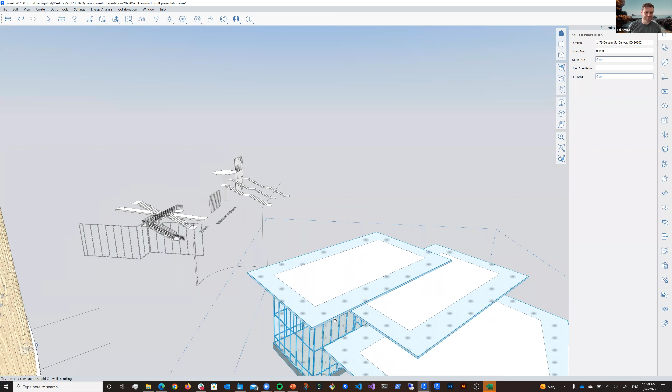I did want to mention also that FormIt is a polyhedral modeler, so every curve is actually a series of edges under the hood. We've got the ability to adjust how that happens in Dynamo. One of those group options is a curve and surface faceting quality. So here I've got this one set really low, to 10. This is supposed to be, in Dynamo, a circle that's lofted, but in FormIt it's going to turn into sort of a polygon. If I raise this, and double click in here and hover, you can see it's pretty coarse.

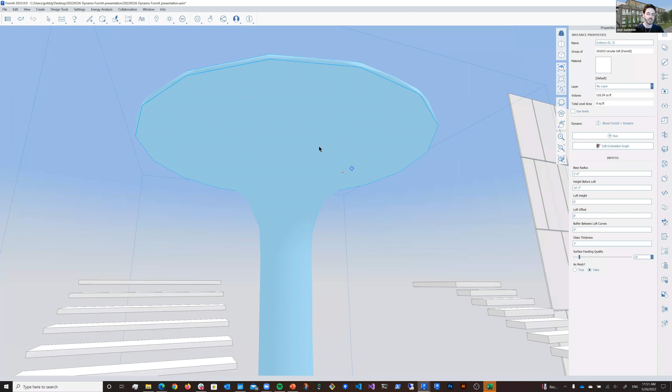I just wanted to point out that you can control how these come out now. If I want to make this like 80 instead, and when I rerun that, you'll see this becomes a lot more smooth. There you go, it's a lot more smooth. Dynamo is really great for generating curvy, swoopy objects, and it's better, I would say, than doing that in FormIt, since in FormIt you'd have to delete it and rebuild it if you wanted to change it. So keep in mind that if you do swoopy objects, you can control how those are faceted inside of FormIt, make them so smooth you would never know they're faceted under the hood.

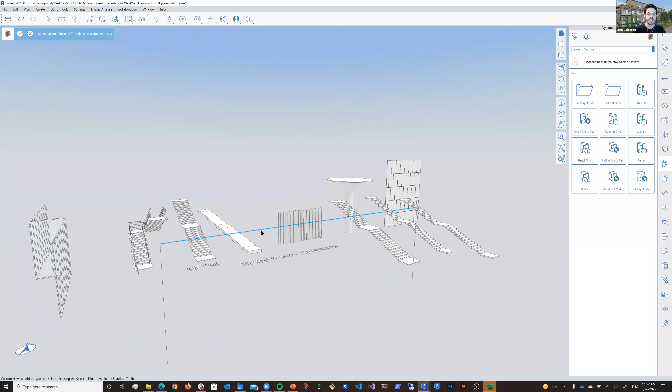Okay, that's probably it. Oh, and there's also, I think a lot of architects out there like string lights, so I did make a string light sample. If you select just an edge, you can generate festoon lighting, if you will. They're a little hard to see, but there I just generated a few little string lights. Then of course you can select that and regenerate it with more lights or whatever you want. Things like this are kind of hard to build regularly, so use Dynamo for that.

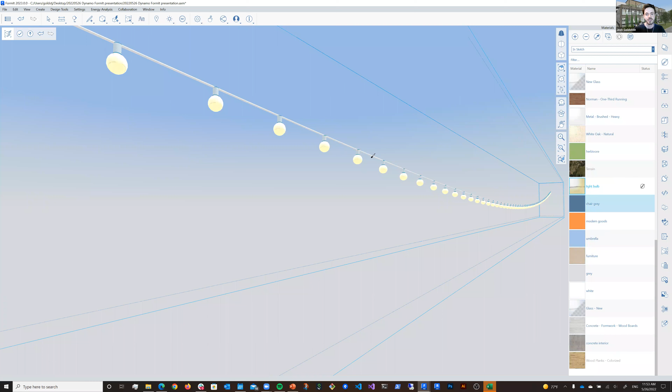Super cool. That would be wicked cool, right? Or radical. Yeah, oh, there's the lights, there they are. Yeah, I just made more of them. Inside of here you can paint the actual light bulbs yellow, and paint the cables black or something like that. So there's some materials for you, and a bunch of string lights. That would have taken a lot longer to do by hand for sure.

And we've got some options in here if you want to do distance or by quantity. So maybe I want, yeah, you can, again, I love Dynamo that you can sort of change how the graph works just by using a Boolean option. So it's very, very powerful. I'll go back to 2 feet. There we go, there's fewer lights along the catenary curve.

I think Beth summed up this session with the blown mind emoji. Good, happy to hear it. Agreed, 100%. I would never go back. If I were to leave Autodesk, I'd never go back to something like Sketchup, but this is just so powerful.

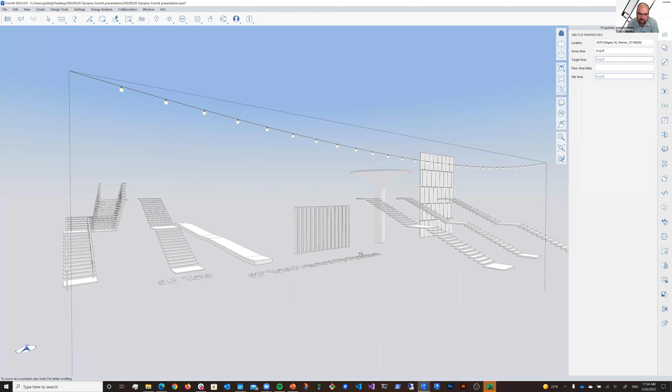I would want this to follow me through my career, it has evolved so much. It's powerful, yeah, amazingly, for a conceptual modeler it's super powerful. It goes into Revit, you can interact with Dynamo for generative designs. Holy cow, why would you ever want to just pull facets and then have those chunky little pieces end up... never mind, right, whew, this is totally awesome. Agree, oh good, no more SketchUp for me. I spent too many hours of my life pushing and pulling things. Right, exporting and then fixing and redrawing from scratch. Yes, exactly, wow, all right.